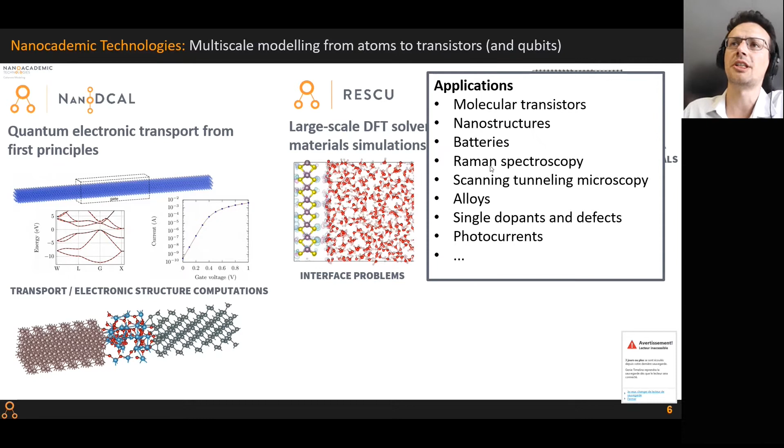There are many applications to our tools. I'm listing only a subset here, but molecular transistors, nanostructures, batteries, Raman spectroscopy, STM, alloys, single dopants and defects, and photocurrent calculations are notable applications. These atomistic codes were used in more than 250 scientific publications.

In the last few years, we have been leveraging our expertise in quantum mechanics and scientific software modeling to develop a new tool called QTCAD, which is aiming at technology computer-aided design of spin qubits in semiconductors. And this is going to be the focus of this talk today.

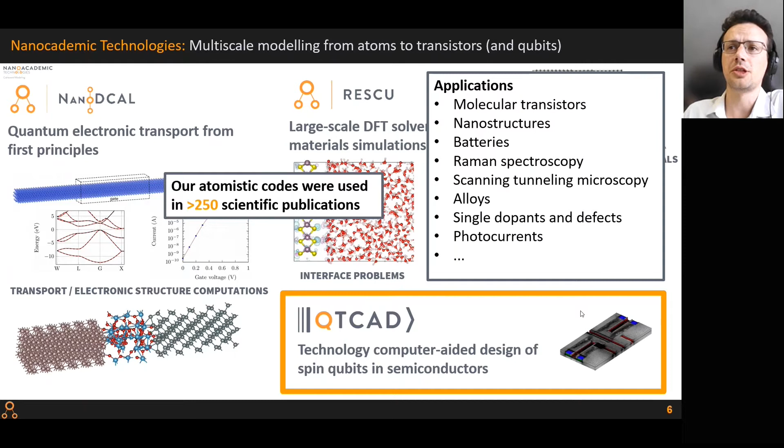So let me continue with the technological background, spin qubits in semiconductors. So here I'm illustrating a typical heterostructure that can host spin qubits. So the basic principles of spin qubits are to confine single electrons or holes in gated quantum dots in semiconductor heterostructures, such as this one here. So typically, a collection of material layers is used to create a potential well, which is created by the heterostructure itself. And this can lead to the formation of a two-dimensional gas of electrons. And then this generates confinement along this Z direction, so the growth axis.

And to provide for lateral confinement, electrostatic gates, so metallic gates, are deposited on top of the devices, and various voltage biases can be applied to deplete regions of the 2DEG and form single, double, or triple quantum dots, or even more. And so ultimately, once a single electron or hole is confined, it becomes possible to manipulate its spin to implement qubits, for example, using microwaves, and then perform 2-qubit gates via the exchange interaction between nearby electrons or holes.

So there are many technological advantages to spin qubits in semiconductors. First, they are small nanometer-sized circuits, so this in principle enables to fit millions of qubits on a single chip. Of course, there are many challenges to do this in practice, but in principle, it could be done. In addition, those devices can be operated at a temperature of 1K, which seems very small, but is actually very large compared to superconducting qubits. And this simplifies a lot the control electronics and heat management.

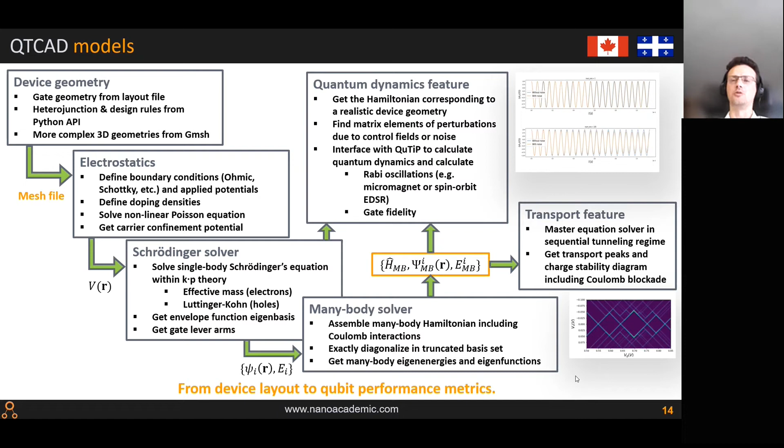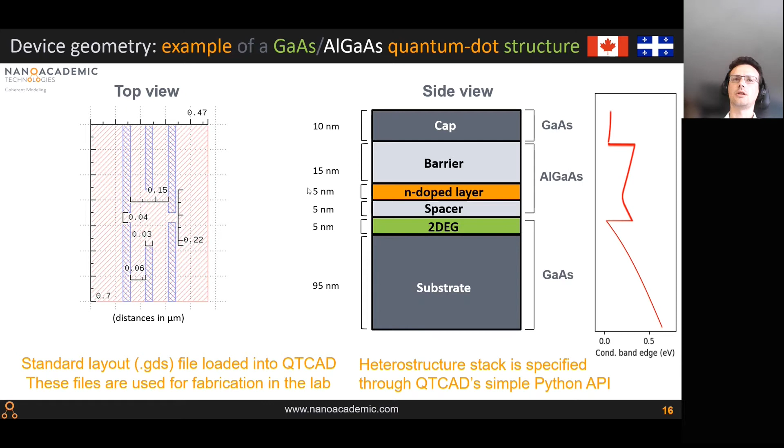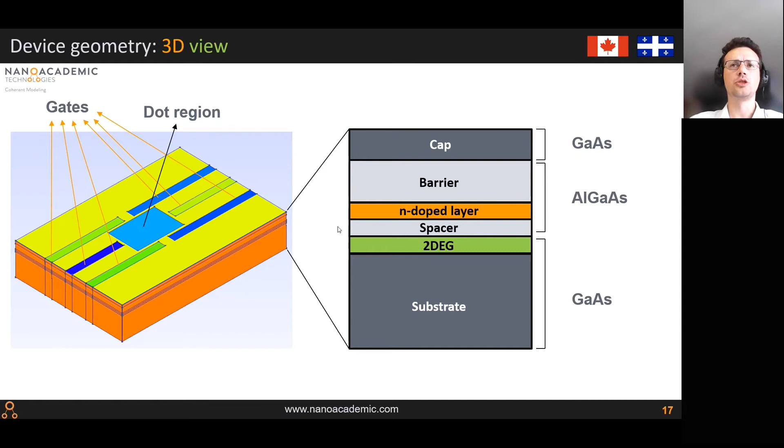So let me leave this presentation mode and show you the scripts that we are going to run for this simulation. So this is the directory in which I stored the script. You can see two scripts, device gen, which is going to be used to load the layout and produce the 3D heterostructure, and Poisson Schrödinger, which is going to be used to define the simulation and run it.

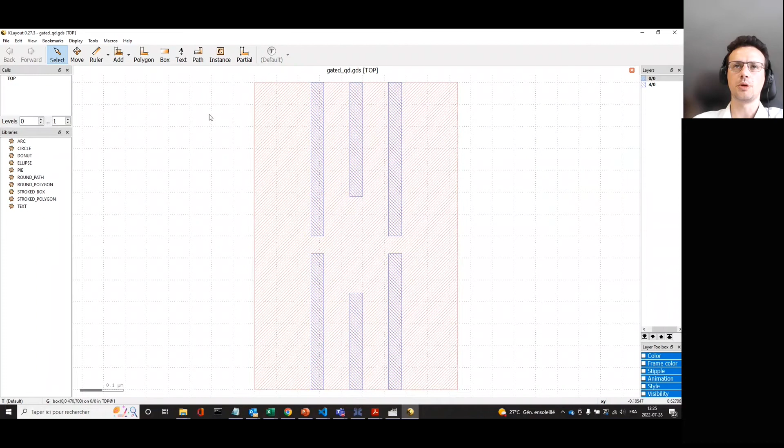There are also three directories inside. There's a layouts directory. If I open this GDS file in KLayout, which is a free layout editor, but you can possibly use other layout editors, we can see this is the layout that I showed in the presentation. And importantly, it's possible to save this layout in GDS text file format, which can be parsed by our device generator called device gen. I already saved this, so I'm not going to do it again.

And there is a directory called meshes in which meshes will be saved, and a directory called output in which the results of the simulation will be saved. So I will first go into this device generation script and run it. So first, in the scripts, I will comment each block of code. This should be relatively straightforward.

The first few blocks simply define variables, parameters of the mesh and the geometry of the structure. So the first two parameters defined here are the characteristic lengths, first for a uniform background, and then you also have a finer mesh characteristic length for the quantum dot region, so the region in which we expect the quantum dot to be formed. I also define here the thickness of each material layer.

So if I go to the presentation, these correspond to the thicknesses here. So I'm actually showing them here, 10 nanometers, 15 nanometers, etc. And I also define a number of mesh points along the growth axis. So these characteristic lengths actually refer only to this XY plane. And these number of mesh layers corresponds to the Z axis, so the heterostructure growth axis.

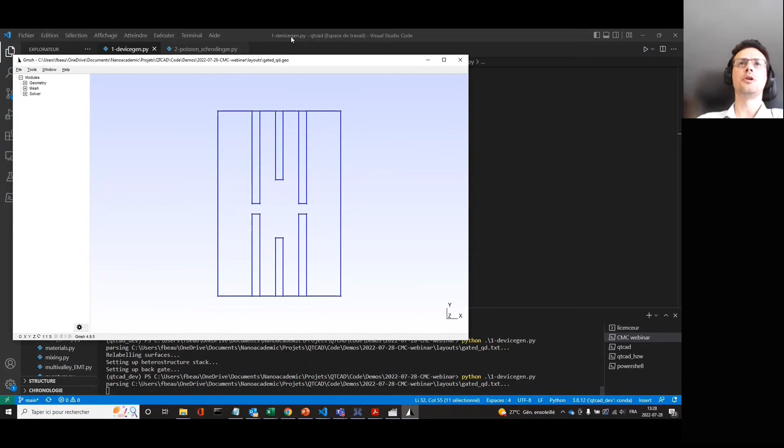So if I run the script, you will see this opens a Gmsh GUI. You can see that this is simply the layout, and I can also show the mesh that corresponds to this uniform background that we just defined.

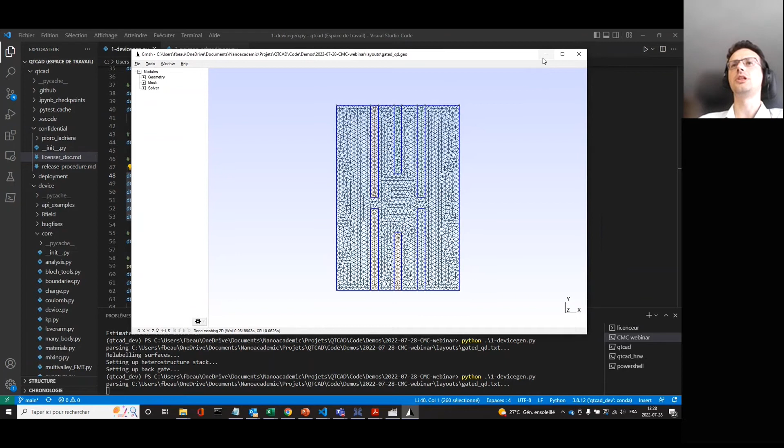The next step will be to label the surfaces that correspond to each gate. So top gate 1, top gate 2, top gate 3, bottom gate 1, bottom gate 2, bottom gate 3. This is important because we will need those labels to specify boundary conditions when you run the script for QTCAD simulations of the structure. So if I close, it will show again with this view command the structure. I could show the labels, they would be changed to those values that we just defined.

And then this is where the non-trivial stuff happens. Here we're defining each layer of the structure, the cap, the barrier, n-doped layer, etc. So simply we define a thickness for each of those layers. We define a dopant density, if any, and also a label that will be used to specify the material in the QTCAD simulation. So if I close the window, it's going to go to the next call of the view structure.

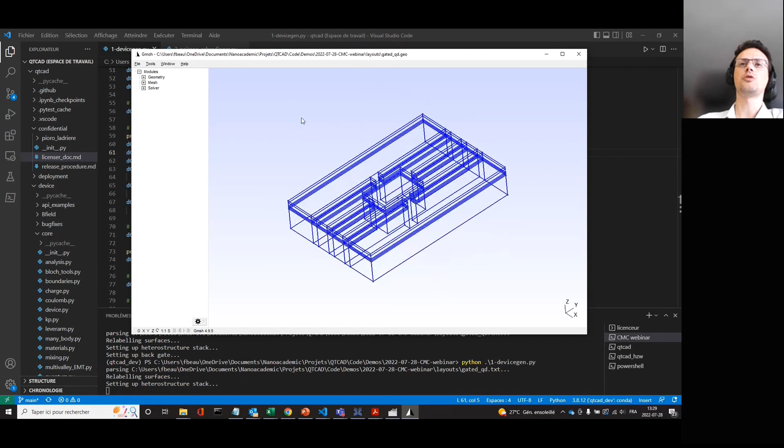You'll see now we have a 3D structure, and something else that I forgot to mention is in this block of code here, we have also defined a dot region.

So this rectangle here represents the region in which Schrödinger's equation will be solved to find if there are bound states in the quantum dot. There are many reasons why we do this. The first is that we might need better precision, so finer meshes in the region in which we solve Schrödinger's equation. Another reason is that solving Schrödinger's equation is more expensive than Poisson's equation, so we only want to do that in a small subset of the structure.

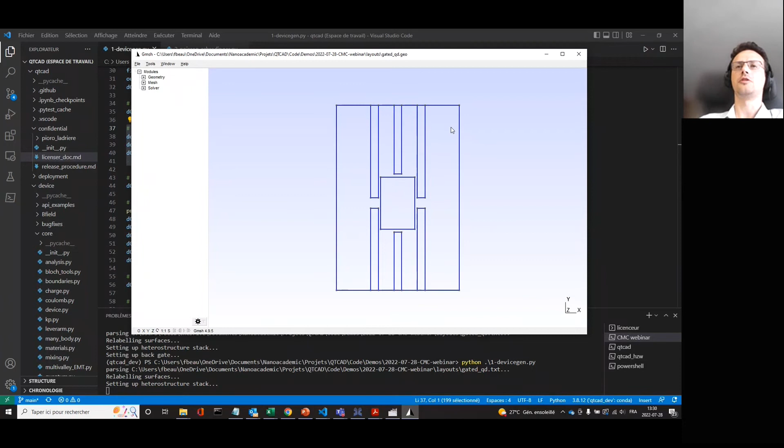And finally, if we solve Schrödinger's equation, we're going to find the lowest energy levels, and those levels may not correspond to states that are confined. There could be global minima outside the quantum dot region that we want to study. So this is why we define the quantum dot region here. And then ultimately, in the last block of code, I label the bottom surface of the structure to define a back gate, and save the mesh in this gated_dot.msh2 file.

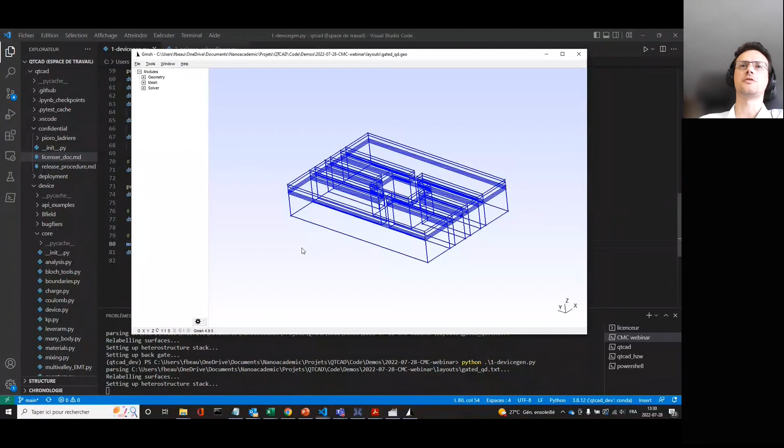So I will now close this, and if I move to this meshes folder, you can see that I now have a mesh file. So the next step is going to be to run the Poisson Schrödinger script. So I will run it now. Sorry about this, wrong script.

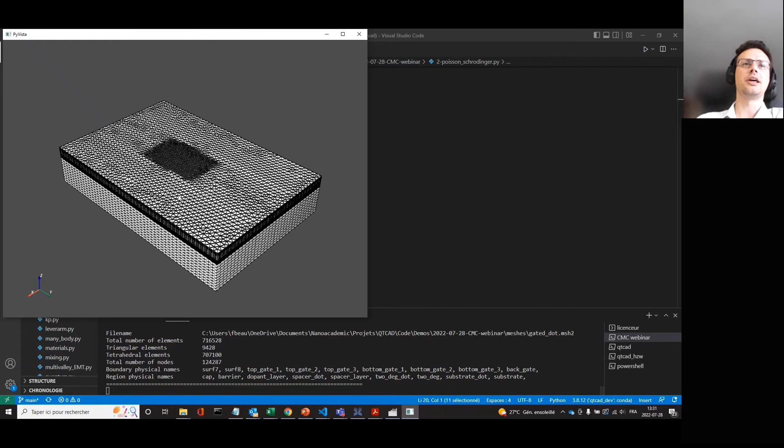Again, this is a relatively simple Python API. The first step is to import all of the relevant modules, then define the mesh path and load the mesh. Once the mesh is loaded, it will display the mesh. So you can see this is the same mesh as we previously produced. If I close, it's going to show the mesh that corresponds to the quantum dot region. I'm going to close again and let the simulation run and comment on the code while the simulation is running. It will take maybe a minute.

So apart from loading the mesh, what we need to do here is to create a device, which is defined on the mesh. The device is the main object in which all of the physical quantities and models are stored. For example, we can set the temperature of the device to 0.1 K using this command set temperature. We can create doping density, a variable that we define for the doping density in this n-doped layer. And then we can set up materials in the heterostructure stack.

The idea is simply to call this new region method on the device for each of the layers that we defined previously and specify a material, which we load from our materials database, and a doping density if it is non-zero. Then we can align the bands across the heterostructure interface, define applied potentials on each of the gates, and define a Schottky barrier height because we are going to use Schottky boundary conditions for all of those gates. Those boundary conditions are set here, and we use an ohmic boundary condition for the back gate, at the very bottom of the structure.

Next, we create and instantiate a nonlinear Poisson solver and set its parameters, for example, the tolerance of the self-consistent loop and the maximum number of iterations. We create a submesh for the dot region and solve Poisson's equation everywhere in the structure. Save the results, the conduction band edge, in VTU format, set the confinement potential from the electric potential that we calculated by solving Poisson's equation, and create a subdevice in the dot region, solve Schrödinger's equation, so create the solver and solve it, and then output the eigenfunctions and print the eigenenergies of the structure.

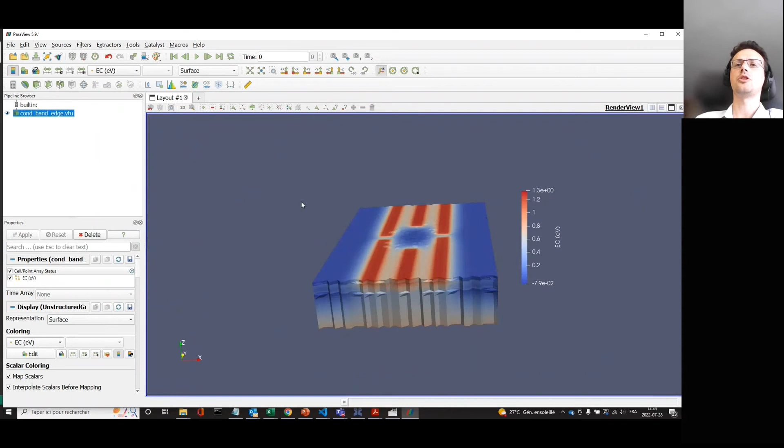If I click apply, we can view the conduction band edge. You can see the color scheme here throughout the 3D structure. We can easily recognize a pattern that corresponds to the gate layout. And you can also notice that there is a potential well being formed. Blue is slightly negative and red is very positive. You can see a potential well being formed between those gates.

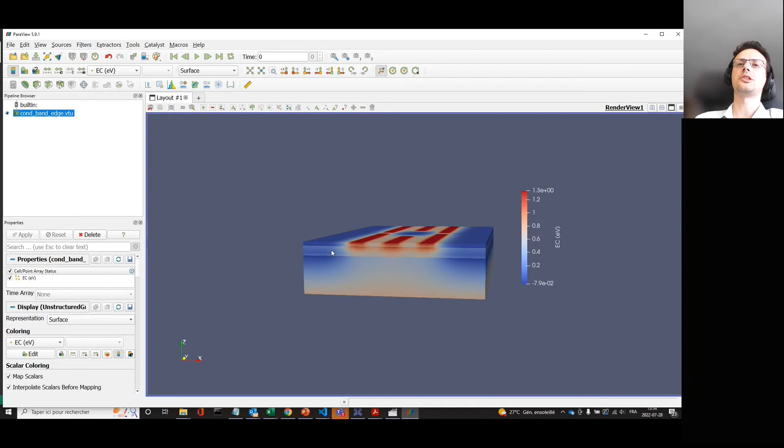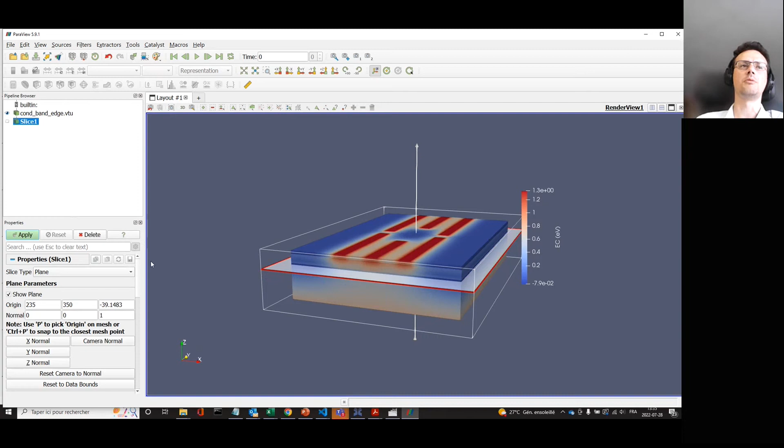Using ParaView, I can also create a slice in a region that interests me. So I'm going to do Z normal. I'm going to create a slice right below the interface between gallium arsenide and aluminum gallium arsenide. I'm going to click apply, and I'm going to rescale the color plot. And this way we can see, yes, we truly have a potential well where we want it.

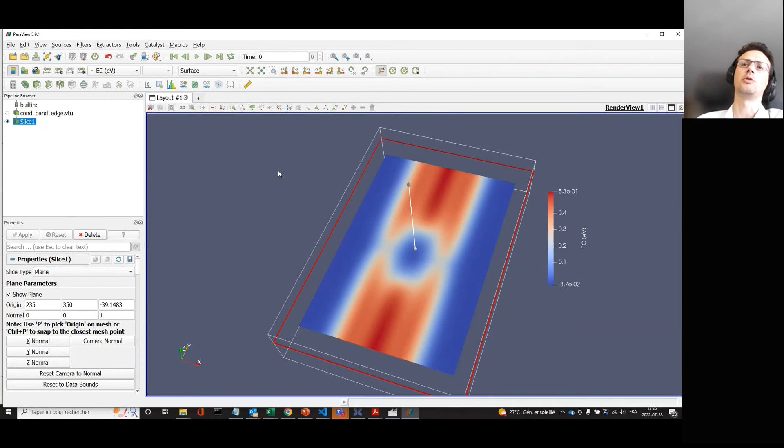And it's also slightly negative, meaning the conduction band edge is slightly below the Fermi level, which is set to be 0 by definition in QTCAD simulations, in which we assume thermodynamic equilibrium. Now the question is, does this potential well enable to host bound states? To verify that, I will open the eigenfunctions.vtu file that was produced by solving the single electron Schrödinger's equation.

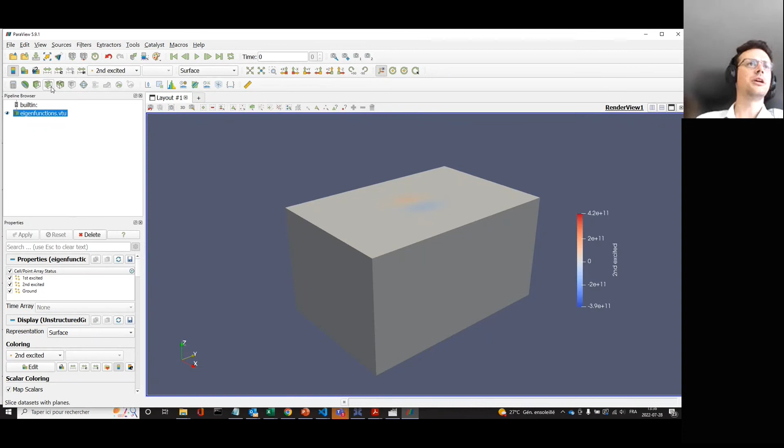I will click apply. Now what you're seeing is a box that corresponds to the quantum dot region. So that is this region below this rectangle between the gates. And we're not seeing much because all of the action is actually inside the box. So we're going to make a slice again. So let me click on this and click on this and look at the ground state. So you can see now this really looks like a confined state. So we really have a bound state actually in the structure.

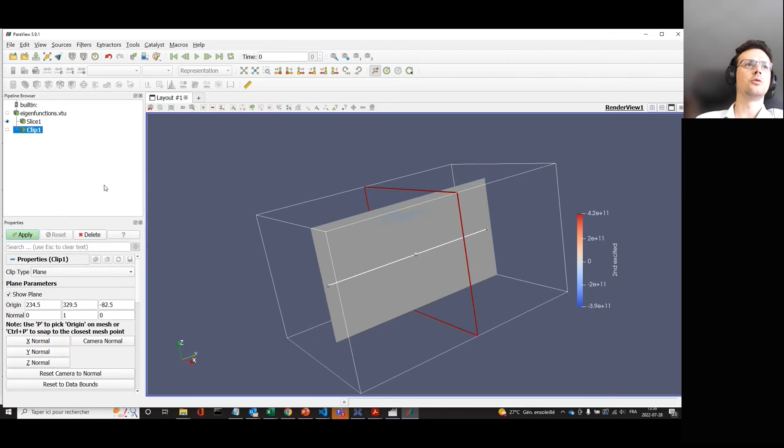And I can also show the first excited state. You can see there are 2 lobes. This is what we would expect. The second excited state, the lobes are in the orthogonal direction. So I actually need to do a slice, which would be Y normal. I click apply. I made a clipping instead. You can see the lobes are formed here.

So I hope now to have convinced you that using QTCAD, simple Python scripts can be used to produce simulations of realistic structures. And then using ParaView, we can visualize the results in 3D and help understand if a structure is promising to host spin qubits.

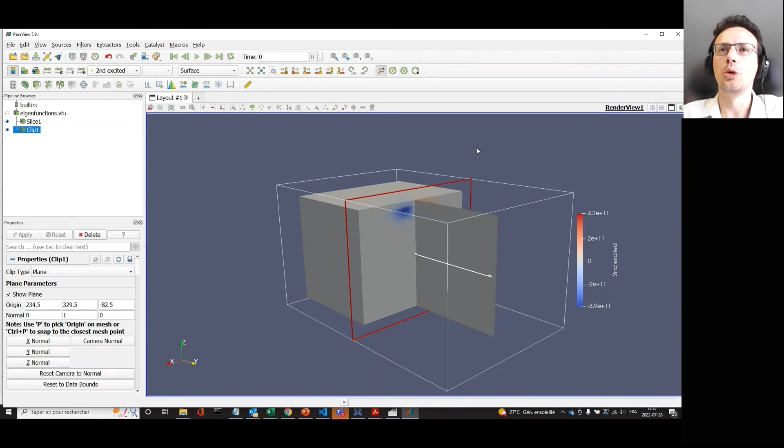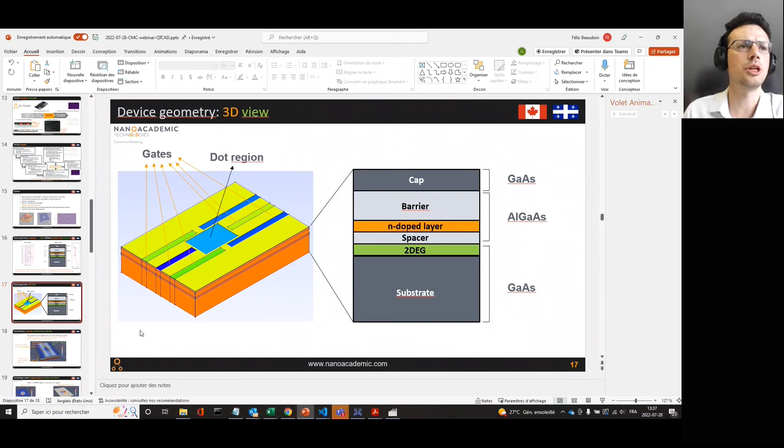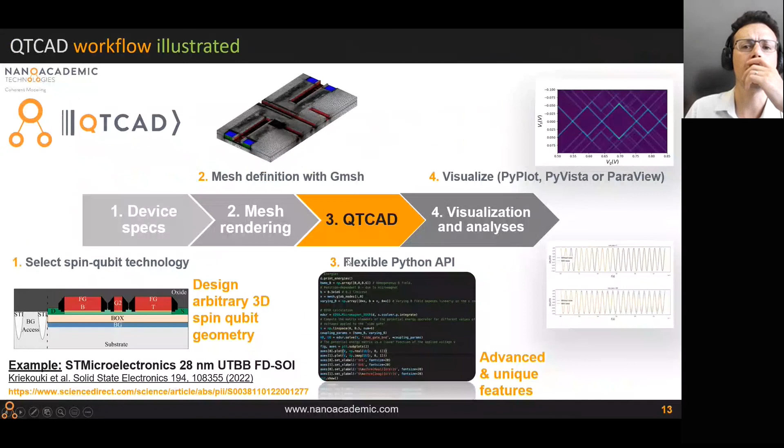So let me now go back to the presentation and go to full screen. I will go back to where I was and follow up with the conversation. Sorry, with the presentation.

So I can see there is a question: is the Schrödinger and Poisson method combined with a non-equilibrium Green's function? So I'd like to answer this question right now. So currently these are equilibrium calculations, so there is no NEGF, but we are working on an NEGF-KP solver. So this should be possible in the relatively near future. Other questions I think I will answer later on at the end of the presentation.

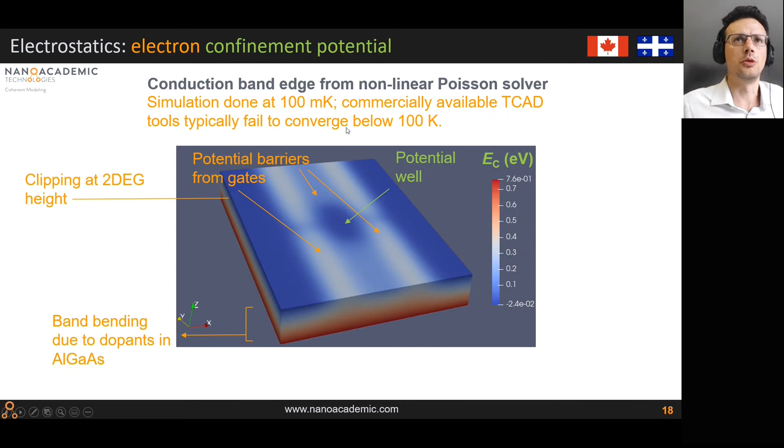So what I showed was really just the most basic simulation of electrostatics at cryogenic temperature. As we saw, we converge below 100 milli-K. And commercially available TCAD tools, what we've been told by our collaborators, typically fail to converge below 100K. So this is clearly an advantage in using QTCAD, because spin qubits are operated at very low temperatures. So we saw this in my ParaView files.

There are, of course, much more advanced features. I mentioned earlier in the models section that we also have a many-body solver that accounts for Coulomb interactions in the structure. So we can use this to calculate chemical potentials. So that is the total energy with n electrons in the ground state minus the total energy with n-1 electrons in the ground state. So more roughly speaking, how much energy is needed to add an electron in the structure. This is particularly important because it determines if current can flow through a quantum dot.

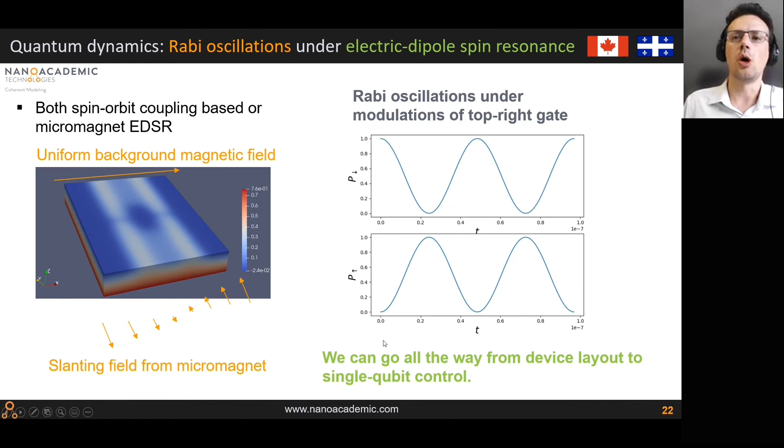So you can see that if you are able to define the magnetic field throughout the structure, you can find the Rabi oscillation rate that corresponds to a certain gate bias configuration and a certain device geometry. So we can go all the way from the device layout to single qubit control features. And there are, of course, many other unique features of QTCAD. As I mentioned before, it is possible to calculate charge stability diagrams.

So using our quantum transport solver, master equation solver, combined with our many-body solver, it's possible to solve for the current that flows through a quantum dot and get those Coulomb diamonds that correspond to, say, 0, 1, 2, or 3 electrons in the structure. We also have a valley coupling tool that enables to calculate valley splitting in a nanostructure, a quantity that is key to operation of spin qubits in silicon.

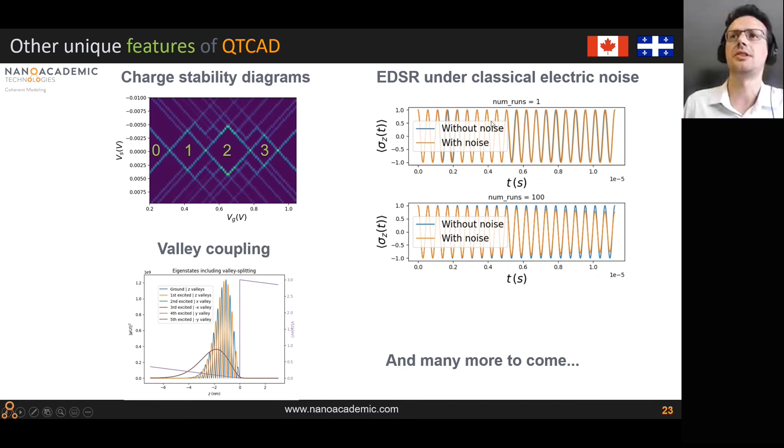And finally, it's possible to account for classical electric noise in the device and see their effect on Rabi oscillations. And we have, of course, many more features to come. So this concludes the live demonstration and general overview of QTCAD.

I would like to end the technical part of this presentation by quickly describing a demonstration of QTCAD that was recently done on an industrially fabricated quantum dot device to show you what can be done beyond the simple heterostructure that we just saw. So this demonstration was done in a collaboration with multiple partners. So Nanoacademic was responsible for QTCAD software development and technical support to partners.

The device itself was designed by STMicroelectronics, Institut Quantique, and Université Grenoble-Alpes. Fabrication was done by STMicroelectronics, and the devices were characterized by Institut Quantique. And finally, simulations with QTCAD were done by Ioanna Kriekouki, who is a PhD student working with all of these 3 institutions and who received technical support from Nanoacademic. The results were published in Solid-State Electronics. So the paper came out, I think, in May 2022, so relatively recently.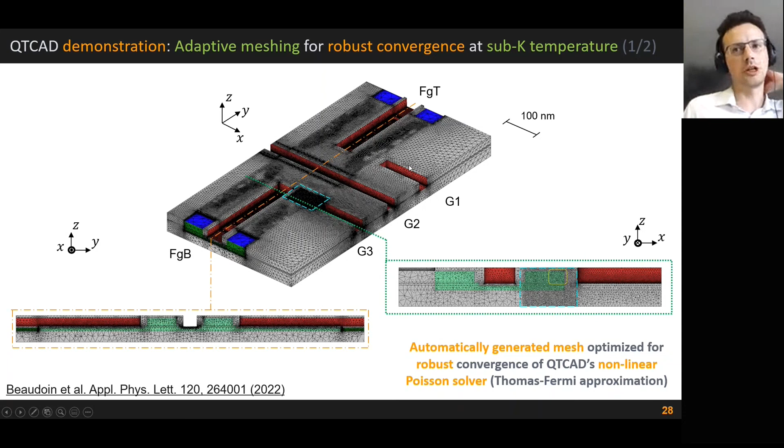The analysis of the numerical challenges and solutions behind this adaptive meshing technique was published recently in Applied Physics Letters. Here I'm showing the mesh that results from this adaptive meshing technique for the STMicroelectronics device. And we calculated the conduction band edge throughout the device, just as in the previous slides. This is a slice just below the interface between the semiconductor and oxide below the gates.

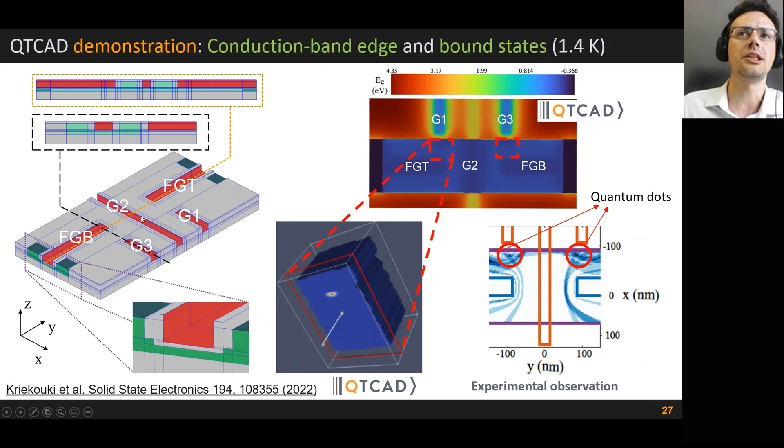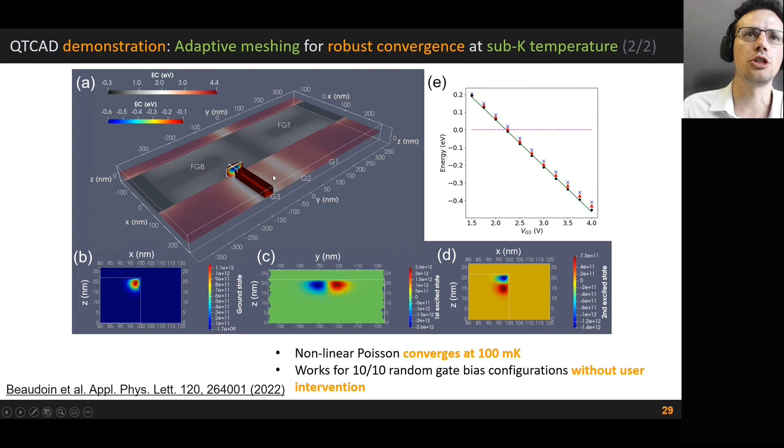Beyond those technical results, something I want to stress is that we were able to converge automatically using adaptive meshing at 100 mK. And to verify that this was no accident, we tried 10 random gate bias configurations, which all converged without user intervention. We also tried the adaptive meshing technique on several other structures completely different from FD-SOI, namely FinFET and gate-all-around FET structures, and we were able to converge in all cases.

In the future, we will keep this relationship with our R&D partners. We will develop additional features corresponding to customer demand and industry needs. We will explore larger quantum dot systems and alternative qubit modalities, such as superconducting qubits or NV centers. So with this, I'd like to conclude the presentation.